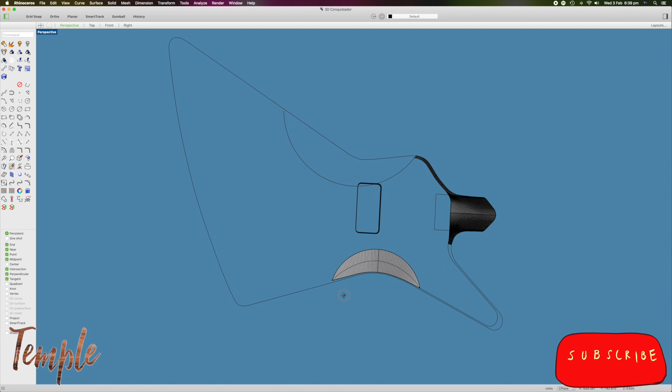So let's get started. Here we've got a very stripped down version of my Explorer. That outline in red is the edge of our top surface. I've had a lot of questions from people about how to do things like this, which would be a little thigh carve transition area. So to learn how to do it, let's go over to this side and do the belly carve, which I haven't done yet, and also show you my new favorite function, which I should have known all along, but I didn't.

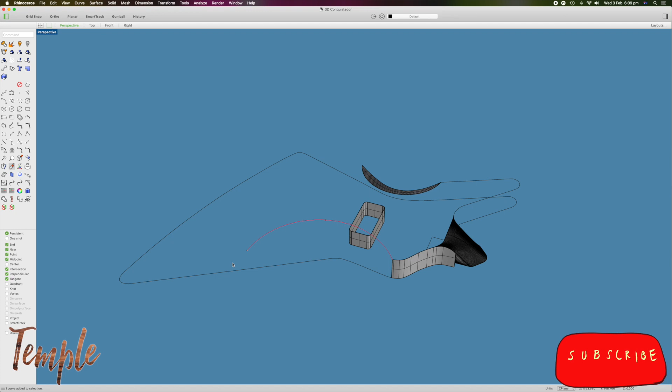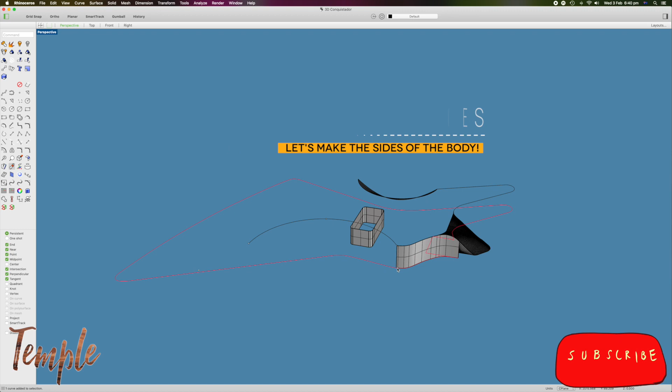Right now I've selected the face of our body, which is very basic. It's a closed curve with, at this stage, a very rudimentary neck pocket. What I'd like to do is make sides for this body. I know how deep I want it to be. I want it to be 40 millimeters, which is the length of that line there.

So if we click on our curve there and check that it's a closed curve, by right-clicking on it, selecting Object Properties, and there it will tell you. Sometimes it's a good idea to leave this window open so that you can just click on different things and see what their properties are. Alternately, if you keep your layers window open, it will show you also.

We know that we want our body thickness to be 40 millimeters, but how do we achieve that without copying this red curve and then filling in between the 2 curves with a bunch of network surfaces? Well, apparently it's very easy. I've loaded a new tool into my toolbar called Extrude Straight. To learn how to do this, check out that episode in the description.

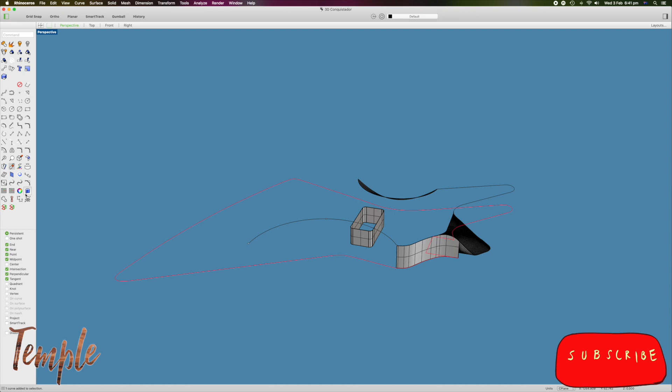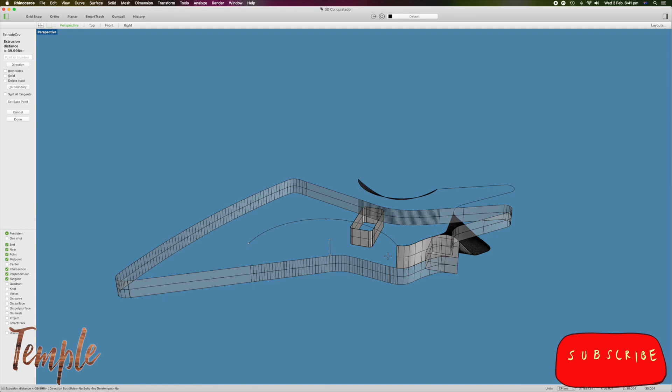So with our closed curve selected, I click on the Extrude Straight, and as I move my mouse, you can see the extrusion moves with it. Right now I'm in Z negative territory and I've just moved it into Z positive. So I want to go from the front to the back 40 millimeters. So I can just click on that end intersection of my line. And just like that, you've got some sides.

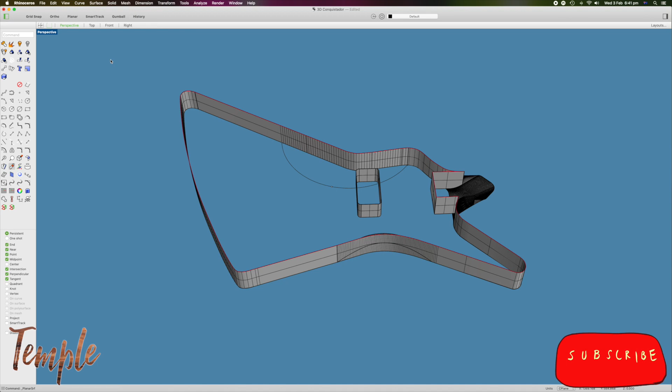So if I want to put a top on the guitar, I can click that curve again, go up to the surface menu and select planar curve, and pow, instant top. Now sometimes your top might be on a slight angle, so in cases like that, go to the surface menu again and try patch. Later on I'll show you what loft does as well. I don't need to keep this top, but it will work for the purposes of this demonstration.

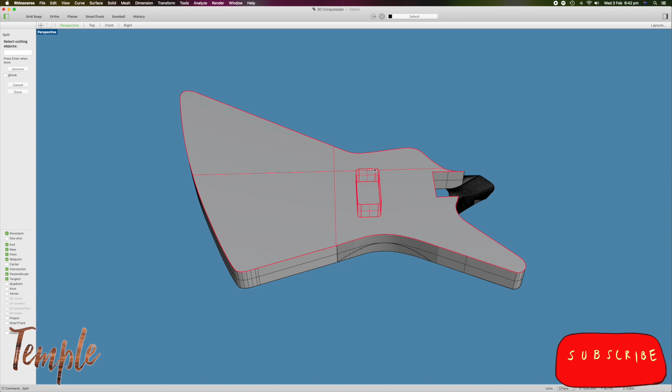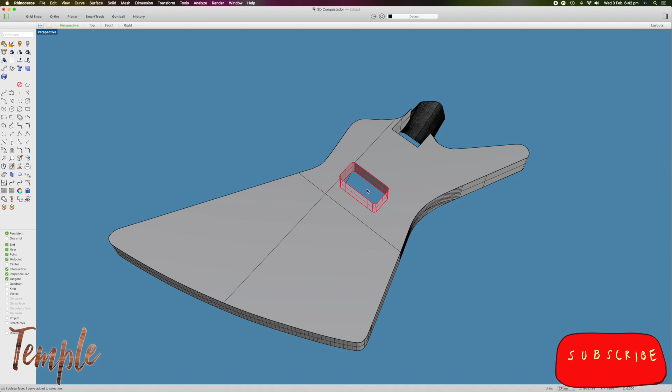So if I select it and then go to my split tool, click that, then select my humbucker cavity as the cutting object and press enter, you can see that the thin line turned into a thick one. So if I click that surface and hit delete, we have a lovely clean top. Now, in just the same way as we did this top with a planar surface, we can do one at the bottom of this humbucker cavity also. At the moment though, we don't have a curve down there to make one with.

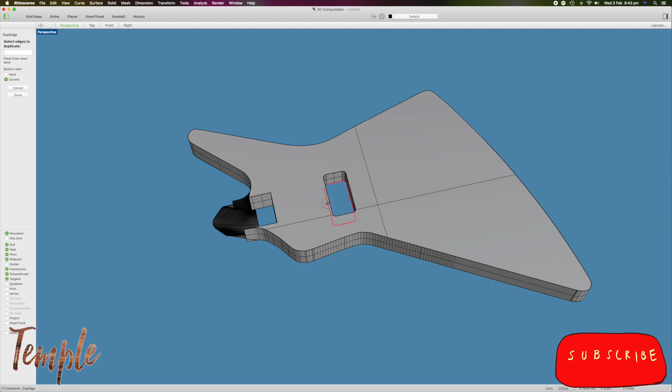So let's make one. Let's head over to the toolbar and grab our Duplicate Edge tool. Once you have that enabled, just go into your cavity there and click around the edge that you would like to duplicate, as the name suggests. And then when you have a full set, either press enter or done. To close the curve, simply press the join tool. Check out the bottom left.

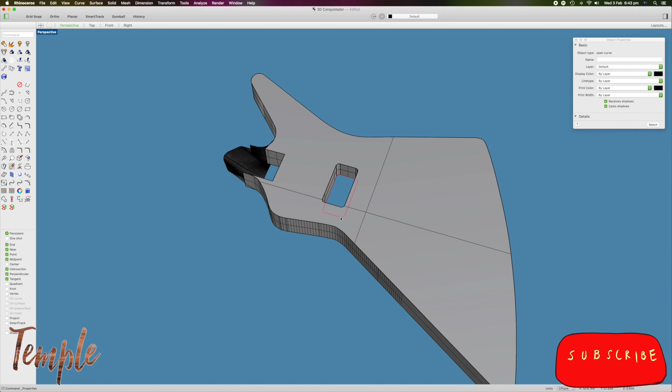We've got a problem, which is great because we can learn from it. We've got an open curve, that's confirmed by our object properties. Somewhere on a completely microscopic scale in here, we've got a section missing. I'm having a visual scan for it and can't see it, but that's okay because I've got a quick hack for that also. Under Curve Edit Tools in the Curve menu, select Close Curve.

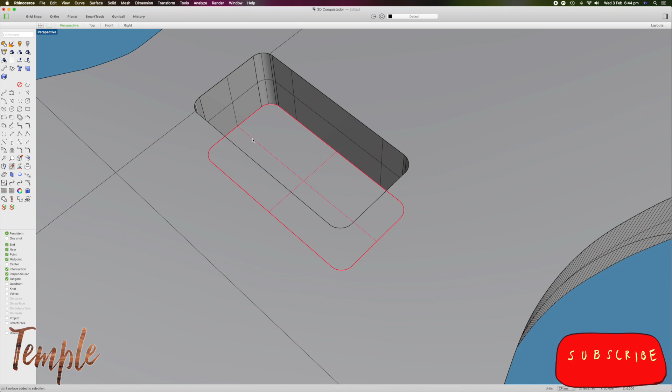In both the bottom left-hand dialog and our Object Properties pane, this is verified. So if I drop another planar curve in there like I did before, we have the bottom of our humbucker cavity. I select that bottom and the sides, press Join, and we have an open polysurface.

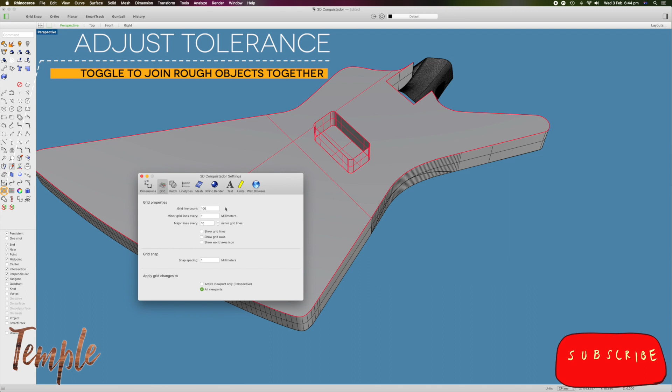There's something else I want to show you in relation to joining. So if I select my open polysurface humbucker and the top of the guitar and go to this icon here, which I use to turn my grid display on and off. If I click grid display on and go to the units tab instead of the grid tab, I like to make sure that my absolute tolerance, relative tolerance, and angle tolerance are all 0.001. So I'm just going to enter that value into these two other fields now.

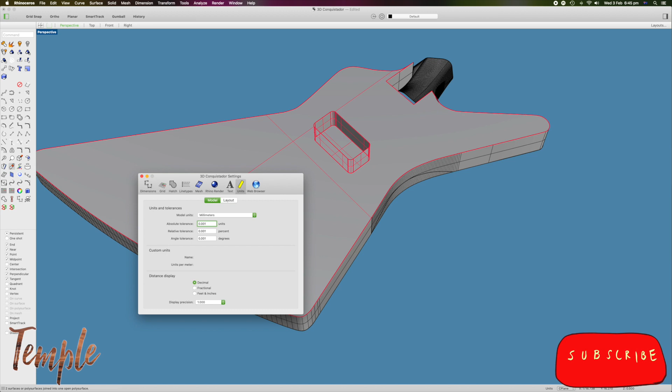So sometimes you want to join one thing to another. So in this example, our humbucker and cap. And in this case, it's going to work, but sometimes it doesn't. And so in that case, what we want to do is go to our absolute tolerance and take one of the zeros out. I've never found a situation where that didn't work, and although you've reduced the tolerance, it's at such a tiny level that when you're making guitars, it makes no difference whatsoever. Once I finish, I like to change it back, add the zero back in there, so that when I return to modeling, I can have a nice tight tolerance.

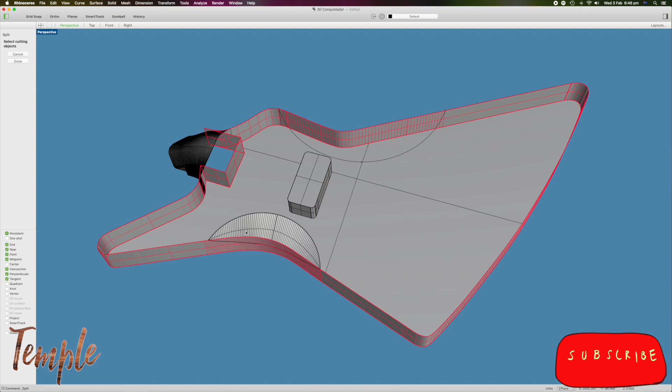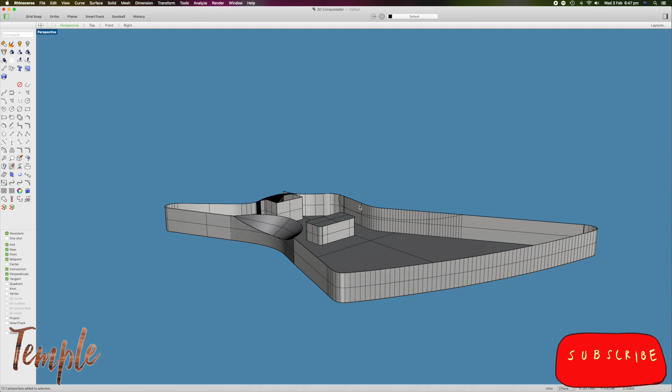Now let's work on those carved sections on the sides of the body. We're going to have to reshape our sides to allow access to these carved areas. So with the sides selected and clicking the split tool, using the thigh carve as a cutting object, we've got a split. I can select the bit that I don't want and hit delete, then select the thigh carve and the sides and join. Now we have a very tidy little thigh carve and the sides of our guitar and the face all modeled.

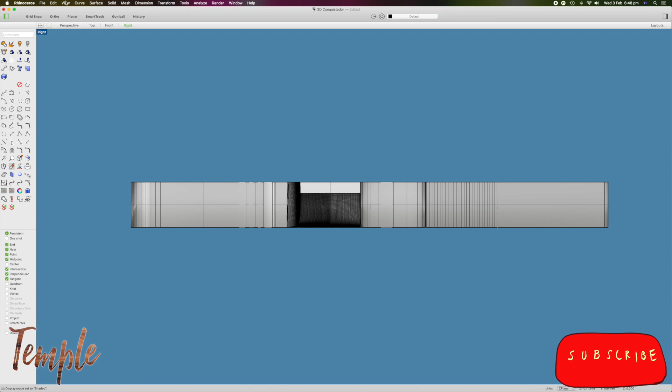Now it's time to construct our belly carve. So let's reproduce this red curve here. I'll delete it and we can start fresh. I have 4 available views: perspective, top, front, and right. And I would really like to see down from the back. I don't need to see from the right-hand side though, so I'm going to sacrifice that view. I go into right, click the view menu, down into set view and bottom.

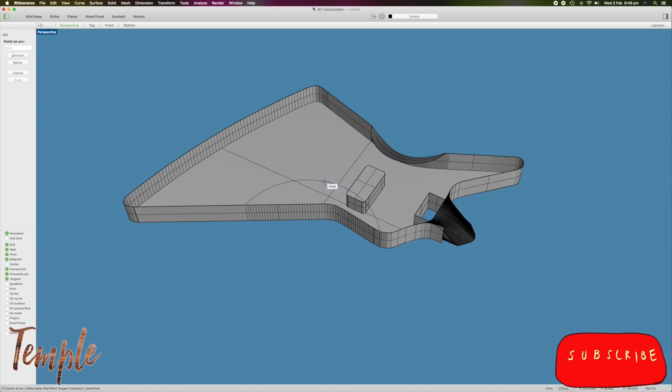I've marked my curve position with these 3 points. I'll just move over into my perspective view so you can see what's going on. And I'm going to select this tool, which is Arc, Start, End, Point on Arc. And so, as the name suggests, we'll click the Start, the End, and the Point on Arc. So if I select that arc and go into our bottom view, we can see we've got that perfect start to our belly carve. The problem that most people have in this situation is, how do I do the curve on this irregular side here?

I don't know if this is the recommended way, but I can say it definitely works for me. I go to my toolbar to my line tool, select that, and then at the end point intersection of the curve, click, and then find the opposite end of the end intersection and click again. Sometimes you may not have an end intersection to snap to. That's okay, just go up to your front view.

If you look at the screen, you can see where my line starts there. I want a line going all the way to the other side. So if I hold down Shift, that will constrain the line to a nice 90-degree angle. And I'm going to click anywhere I like. Then I'll pop back into perspective view and repeat the process. So we've created a curve and two right angle lines from it that all connect perfectly to each other.

And just to test that, I'm going to select all three, press join, and in the lower left we can see that we've connected them all successfully. I'm just going to quickly hit Command Z to unjoin them because I don't actually need them connected. I was just demonstrating. Now I reselect my two lines and hit split, and I'm going to use this curve that I left there before as my cutting object.

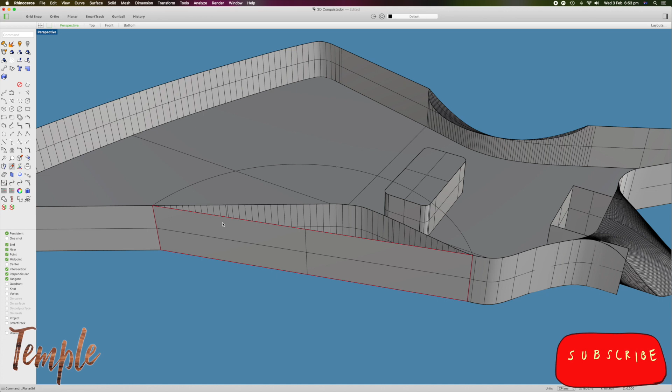Now we select a line tool. I want to place it in the middle of the rectangle, so I'm just scanning, and there it is. And I want to attach it to the perpendicular midpoint. Now with the rectangle still selected, I'm going to surface planar curves. That gives us a planar surface to add geometry to. Just quickly delete that rectangular curve.

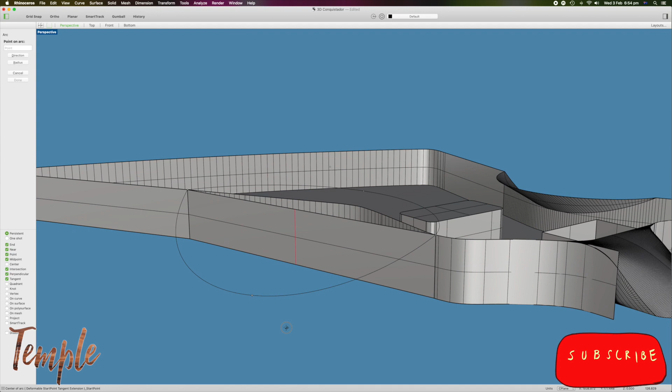Now we want to grab the same tool that we used before, arc, start, end, point on arc. We'll click here at our intersection and at our perpendicular intersection. Now on a Mac, which I am, if I hold down Control and then left click drag the mouse, it allows us to change our view within the perspective.

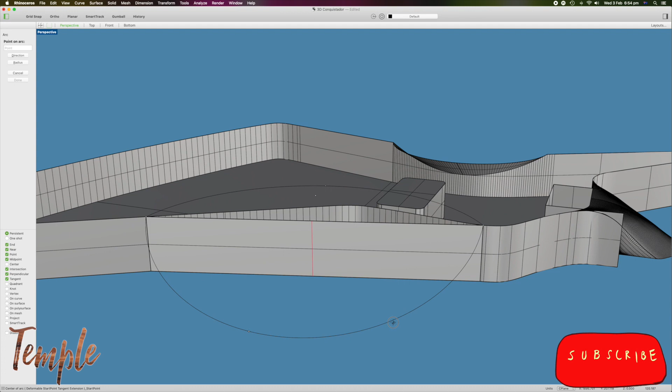So as we travel down that central line that we created before, we're trying to find the midpoint. And what we're finding instead is that the humbucker cavity is running interference. In this case, I can find the midpoint, but that's not always going to be the case, so let me show you a workaround. Just like before, we'll hold down Control, left click with our mouse until we find somewhere where there won't be any interference, like right there.

Left click to place. I've put mine right in the middle, but you might like one that's more shallow or deep. It's really up to you. We finished with the plane, so we can delete it, and the line, delete it. Now we've created two curves, and if I select both and then press join, we can see that they are a closed curve. Command Z to undo because I was just testing again.

Now I'm selecting the extrusion that we made before because that's what we want to cut into. So I've selected the split tool and I'm selecting the curve that we just made. So as I press enter, it makes the cut in the surface so that I can select the bit I don't want and hit delete. But we have a problem. It also made a cut on the opposite surface, which is something we absolutely don't want.

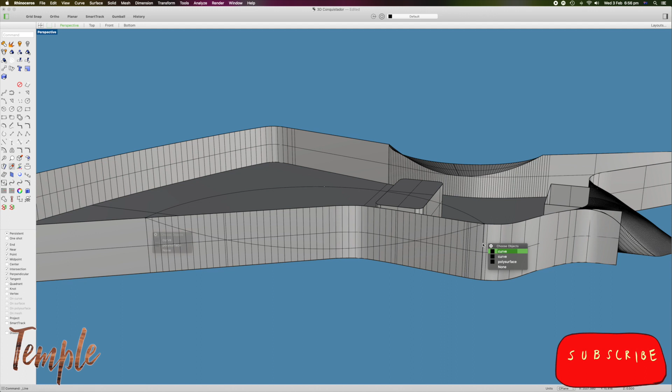It happened because we selected the entire extrusion, so if we check and see that we still have those two vertical lines from before, I can select the side of the extrusion, hit split, and then use those two lines that we left there as our cutting objects. Now we've successfully isolated this one panel.

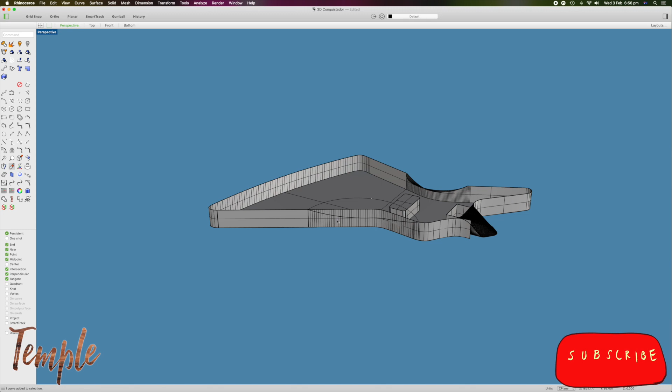So with our panel selected, we hit split, use the curve as the cutting object, hit return, delete the curve because we no longer need that, and then delete the leftover panel. Now we just need a curve here, so we'll go to duplicate edge, click the edge, hit enter, and we've got it.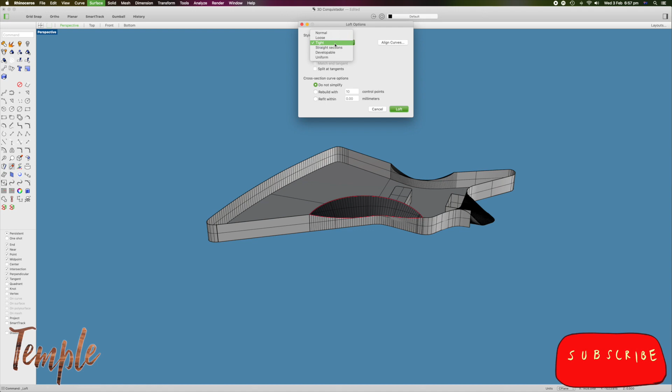Now that we finally have our two curves, I'm going to surface and loft. There are a bunch of settings in here, and I just use the ones on screen. I haven't changed them from the factory settings. And look how clean that is. A wise person at this point would save those curves to a separate layer and hide them.

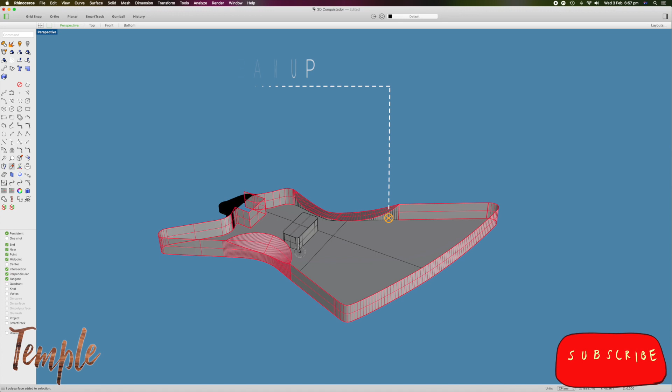So now we've constructed both of our carved areas there. But I have to say, I don't like how messy this has become. We've got our extruded sides and then we've got that one panel right there. Sure, I could rejoin them, but I'd much rather have one nice, clean, continuous outline.

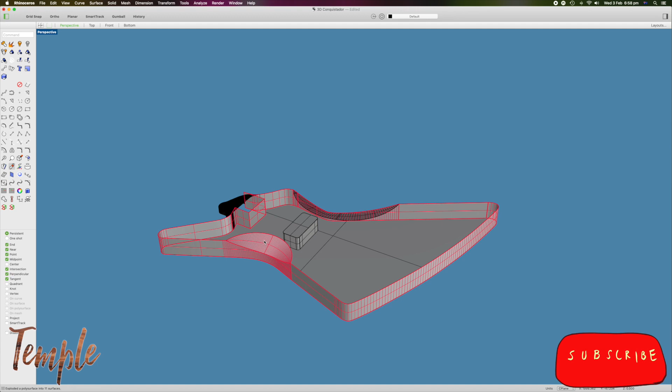So I make the selection you can see in red and hit explode to separate all of those different pieces. I then press Command and click on this curve here to deselect it. Now I can hit delete.

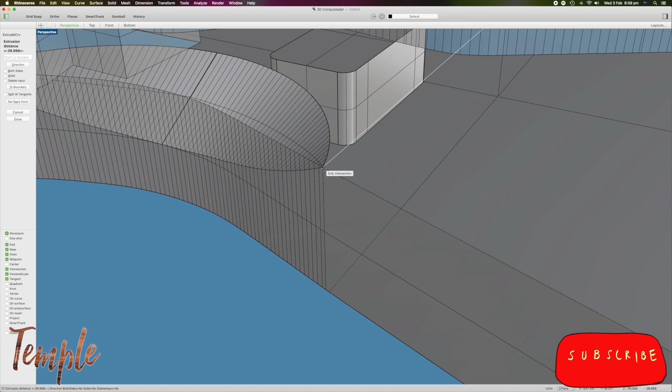I'm left with a bit of leftover geometry, so I'm just going to clean that up quickly. And in order to remake our sides, I just select our outline, go back to Extrude Curve, and if I zoom in, I'm going to click on this nice little intersection.

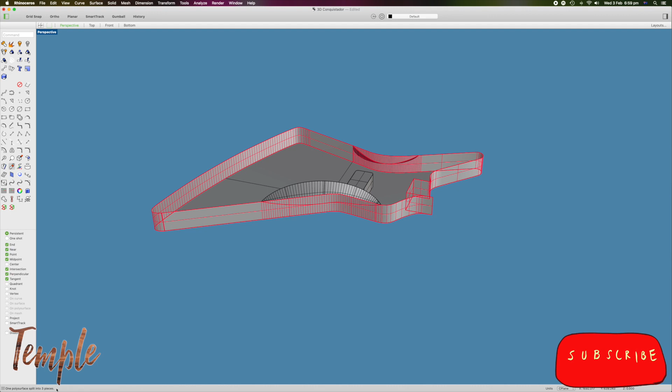Now I can select the entire extrusion and then move over to Split again, select my curve that I left behind there and the one I left on the other side as my cutting objects. Hit enter, and now I can delete the bits that I don't want. Now I select the bits that I do want, head over to Join, and they're all connected,

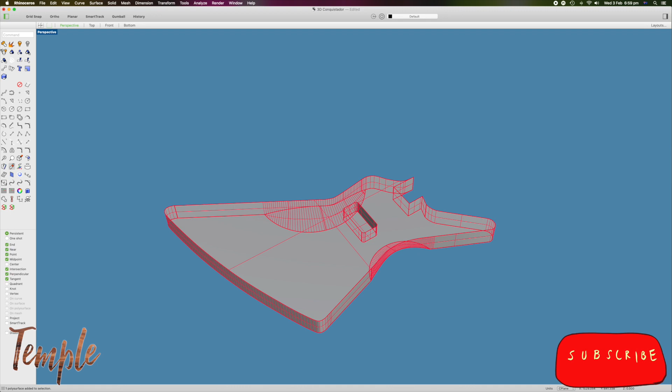just like all the people and trees and animals and plants in the world, and rocks and water and gases, and maybe ghosts. I'm not sure about those.

To put it back on this, I'm going to select Duplicate Edge again. We'll miss that curve because we already have that curve there. We'll run around the guitar, miss that curve, do that, hit enter, and then join. Now if we look in our bottom left dialog, we can see we've got 3 open curves where we should only have 2. That means we've got a piece missing.

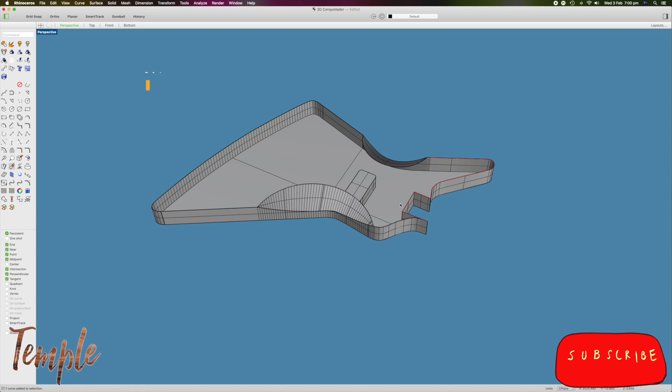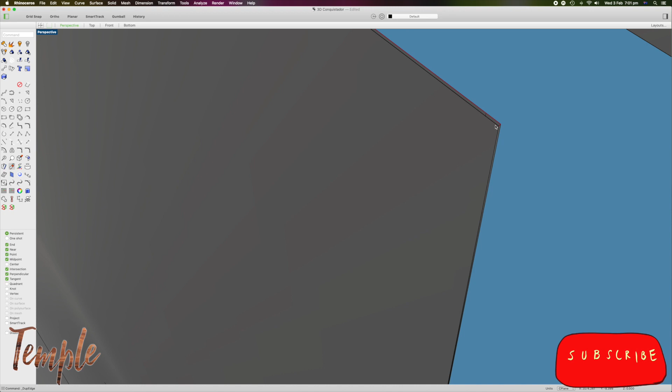To find it, I'm clicking on this curve at random. It could easily be the other one, but we'll start here. And I can see that that's where the piece is missing because the red suddenly stops and then we've got that curve there. Can you see it? So when I move into position and use the Duplicate Edge tool, hit enter and then select the curves around it, I can join them and we're all good.

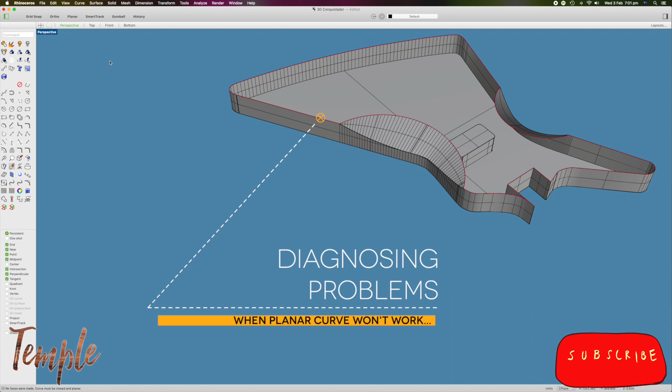On the finished model, I wouldn't actually leave that little edge there, but for the purpose of our tutorial, it's all good. I'm just selecting all of my curves now. I can hit Join and we have a closed curve. If we go to Surface and Planar Curve, we should be able to close the curve, but it won't let us. Even though the curve is closed, it's not completely flat across its plane.

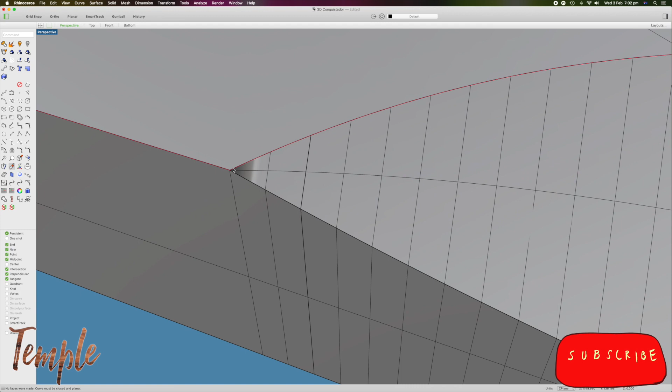Now, I learned quite a long time ago not to get too super anal as a CNC machinist, because even though we have the technology to zoom in on any particular point to such a ridiculous degree and then obsess over it, these small areas would be rounded over by sandpaper or files, so I really don't cry when I get results like this. So let's flatten out our curve.

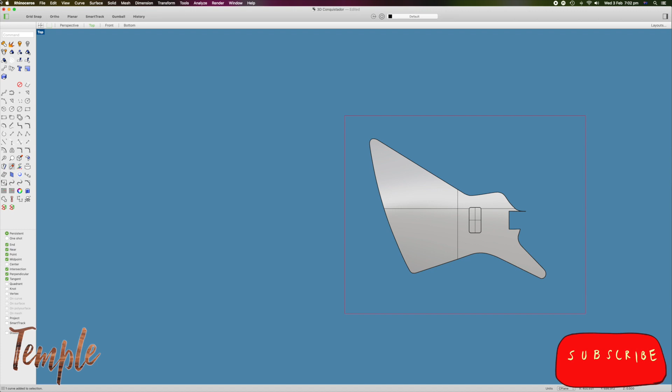What I want to do is go to my top view and then select a 2-point rectangle and just roughly click outside the area of the body, select it, go to Surface Planar Curve, and then delete the original curves. That's created a planar surface on our C-plane. Now I select our disobedient curve and type into the keyboard PROJ. That brings up our option to project to our C-plane. We want to select delete input objects because our input objects are bad.

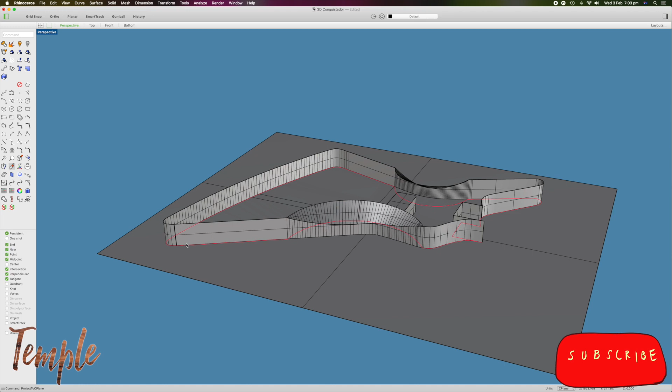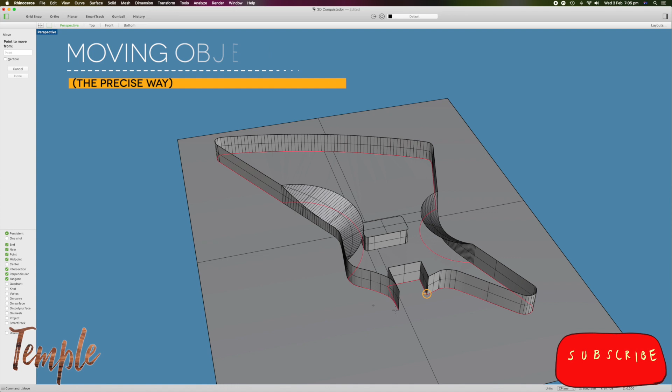So as I click yes, it's projected our curve to the C-plane and now it's perfectly flat. That means we can use the curve, but first we have to put it back where it was before. What we learned earlier from when we originally made the curve was that this area here doesn't culminate in a sharp point, but this area over here does. So to move the curve into position, I can select it and click Move, click my sharp point, and then click again at the perpendicular point.

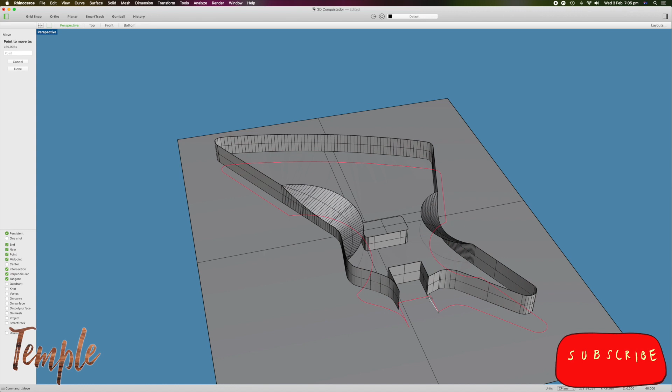For an absolutely precise method of doing it, you can select your curve and click Move, click your sharp point, and I'm typing in 40, hitting return, and holding down Control. And what that means is it's constraining the curve at 40 millimeters from the origin point. When I'm ready, left click to place. We don't need our C-plane guide anymore, so we can delete it. Now we've repaired that curve, I can select it, go to Surface Planar Curve, and we've got it.

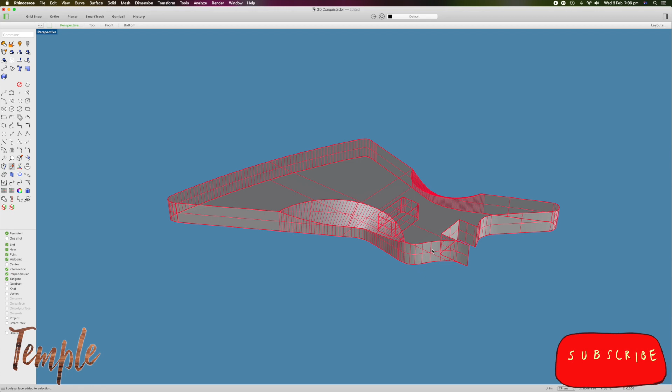So now I can select that back, and then select literally anywhere else on the guitar because it's already all joined together. Head over to Join, click it, and we've got one open polysurface. I was told when I first started learning about this stuff that you always want to have your polysurfaces closed, but because I do my CAM operations in Fusion 360, Fusion selects areas like this even if they are all joined together.

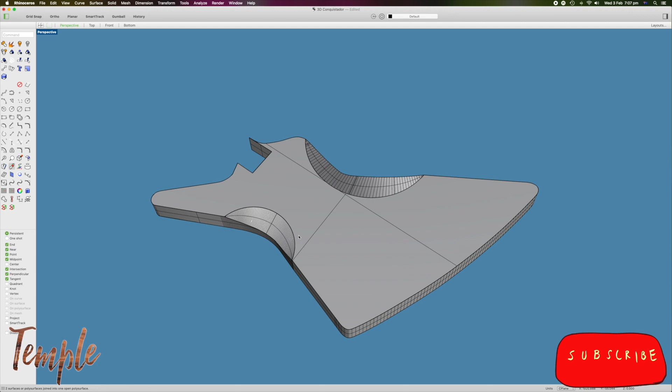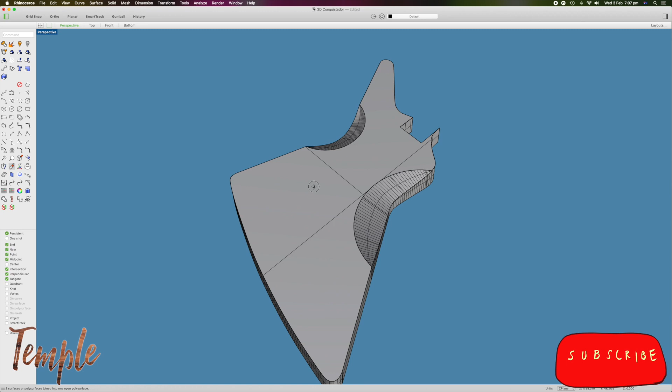So in my experience, in my workflow, it really doesn't matter. Regardless of how I do things though, this is to teach you the correct ways of doing things. So let's pretend that we're finished with this body even though it doesn't have a heel joint or volume potholes or anything like that. And we'll close the polysurface. I can't visually see any of the leaks, so let's try something else.

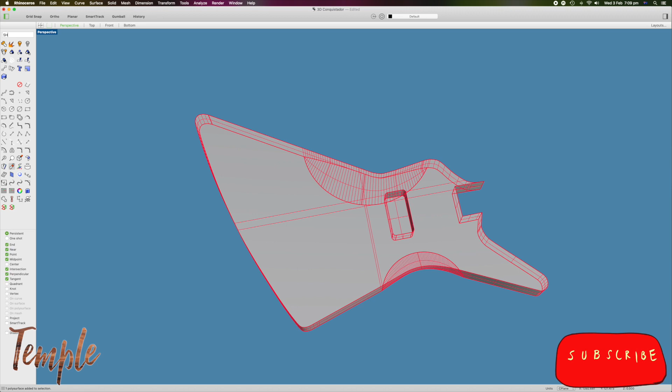So I've selected our polysurface, and you can either add this icon, Show Edges, to your toolbar, or if you only use it occasionally, you can just type ShowEdges, all one word, like this. It should be highlighted, so just select it by pressing Enter, and you'll get this dialog box and it shows my edges in a horrible purple color. Those are edges that are unjoined.

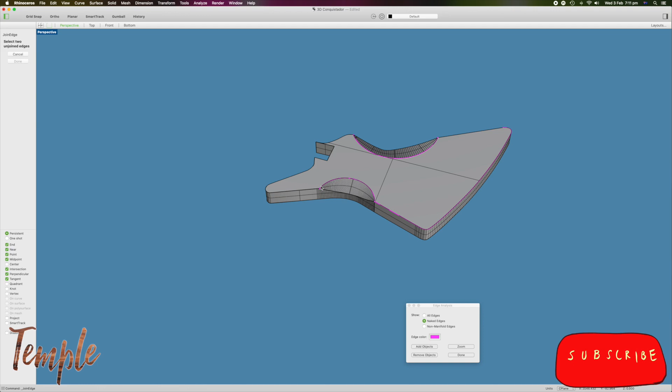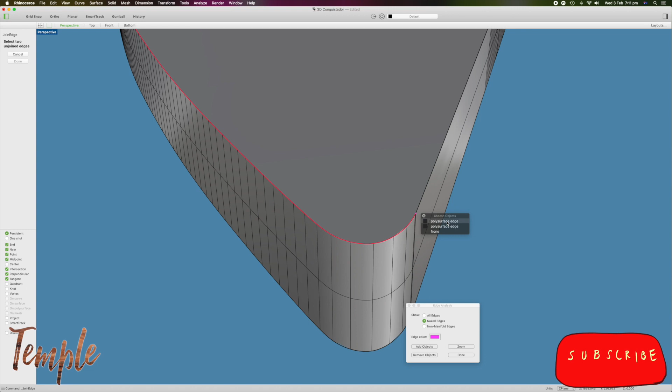I've placed a Join Edges icon in my toolbar. I click it, and if I zoom in to this part here, we can see where the unjoined edge starts. I click on it, and you can see in this case it's brought up a menu. This is the top edge and this is the side. So you can click either one and then go back and click the line again to select the other one. Hit yes and it's all joined up. Now I'll do the others.

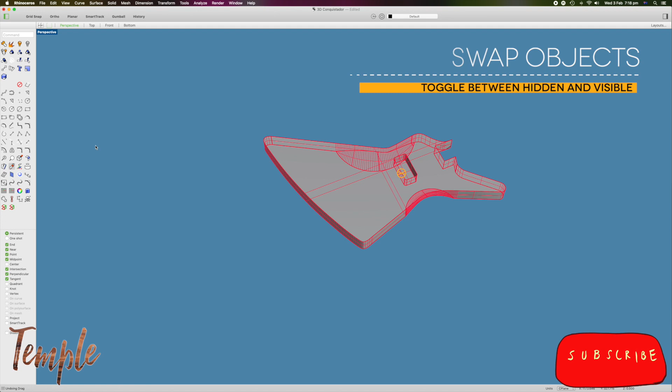When you're busy modeling, sometimes you can be left with a lot of junk like this. This is the stuff I don't want, and in red is the stuff that I do. So a quick selection hack is to select the stuff I do want and then hide it. Then go over to this icon here and swap hidden and visible objects. That means you can work on the area that you like without all the clutter.

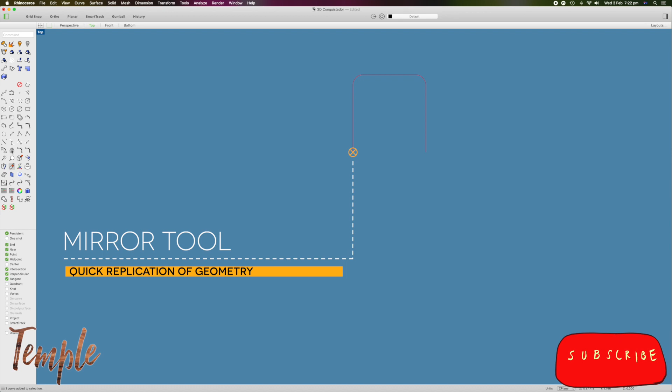Another big workflow time saver is the mirror tool. Here I've drawn half of a humbucker cavity, so if I go to the mirror tool, click one end of it and then click the other, and then select the second curve and join them together, we have a closed curve.

When you're prototyping, you have to juggle a lot of values, make things bigger and smaller. So if our humbucker cavity in this instance was too small and we wanted to enlarge it, we'd move over to the offset tool here. You can see in the distance field up on the left that you can change that value, and our value is 0.5, so I'm going on the outside direction. You can go on the inside if you like. Hit enter and there's a perfect offset.

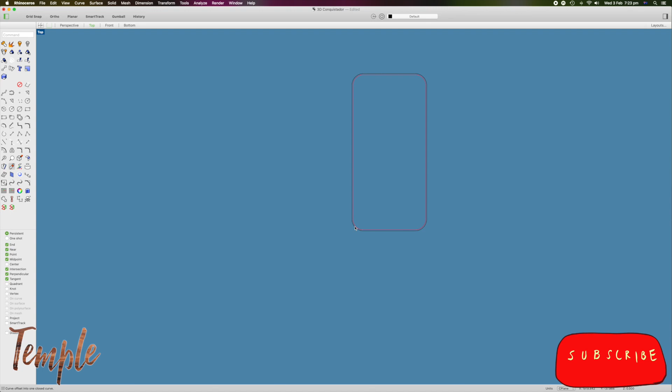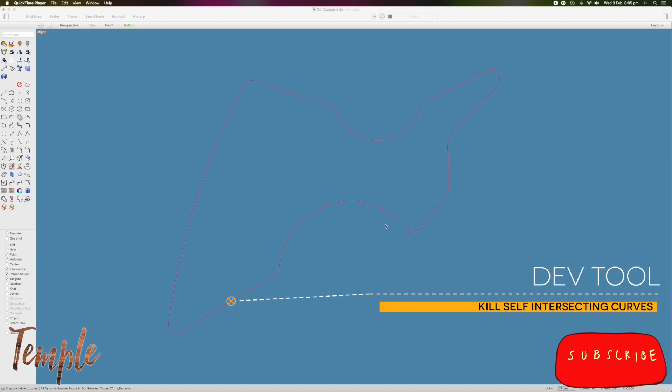Here's one last problem. I've got a curve here and it's a closed curve, but unfortunately it's also a self-intersecting curve. That means that one curve component and another curve component are overlapping somewhere, but it's way too small to see. To fix it, there is a function that isn't in any of the menus. It's a developer tool, so officially it doesn't exist in Rhino. So type TestCrvSelfIntersection, and then hit enter.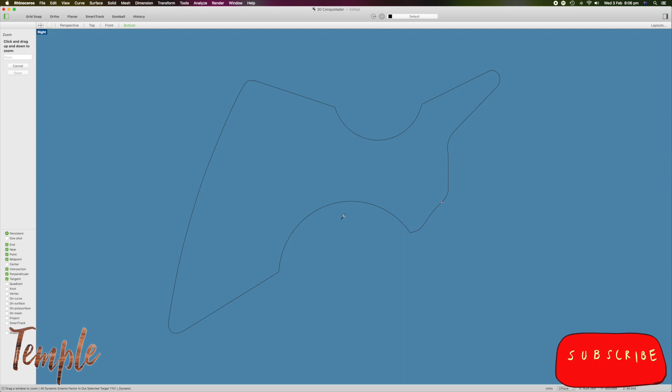Suddenly a point appeared just here, and that point indicates exactly where our curves are self-intersecting. So I'm just going to pull out my zoomy tool here, and there it is. We're zoomed in to such an incredibly detailed extent that there's just no way you'd see this on the screen. I've selected the curve and exploded it.

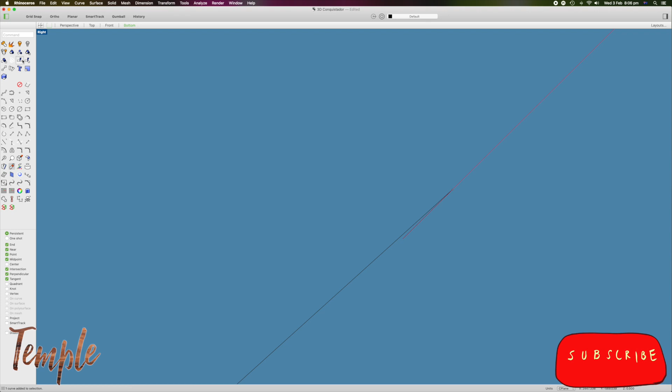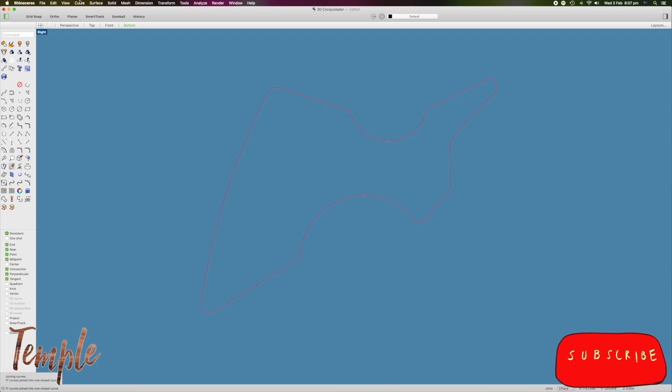Now I'm selecting the curve that is the problem, splitting it with the curve that isn't a problem, hit enter, delete the problem curve, and there's actually two, and delete the point that Rhino was nice enough to leave there for me. So if I select all of the curves and deselect that point, which I'm going to need in a minute, join them, we've got a closed curve, and when I do a planar curve on it, it worked. So that means we've eliminated the self-intersection.

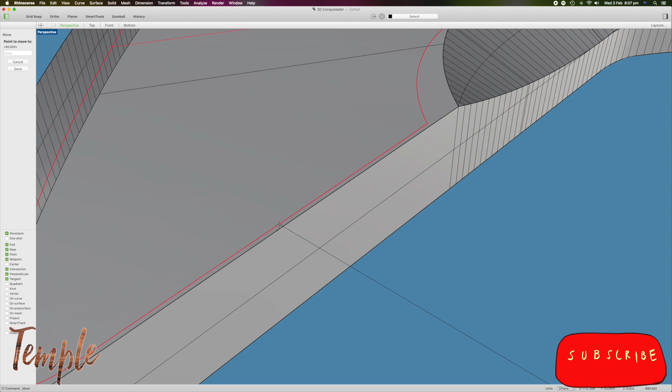Now I select the curve, my little point here, and the surface, move to perspective view, and you can see I've left myself a point on the body there, so I know how to align these two. When I've got my alignment, left click, I can delete both of those points because I don't need them anymore.

So there's my update. Obviously Rhino is incredibly dense, and I'm hoping to bring you a lot more of these updates in the future as I learn more about the program.